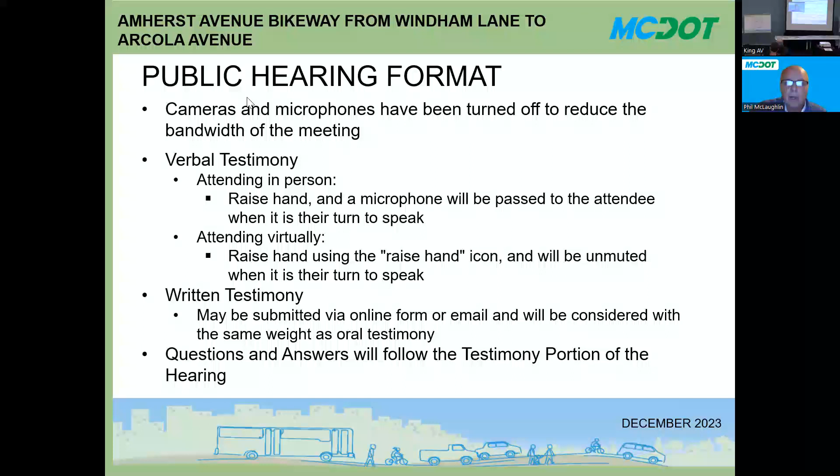Tonight's hearing is being held pursuant to Section 49-53 of the Montgomery County Code. The purpose of this public hearing is to obtain resident testimony and comments regarding the potential project, to assist in determining if the project is in the best interest of the public and whether or not it should be authorized for construction in its entirety or any portion thereof. This forum allows you to provide testimony about the project either in support or in opposition. Testimony and comments received may influence the final design.

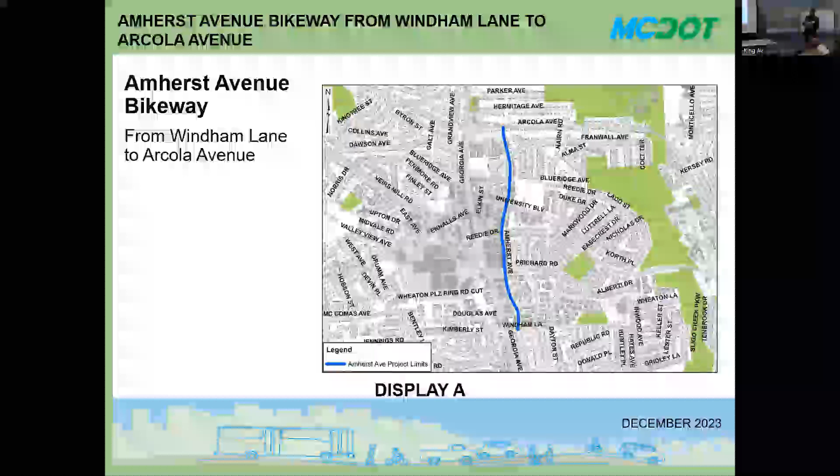The subject of this evening's public hearing is to consider a proposal to construct the Amherst Avenue Bikeway and other associated work at the approaches. For your convenience, we have posted a few downloadable displays that will aid in the visual description of this project on the project website. We will review them as I describe the project.

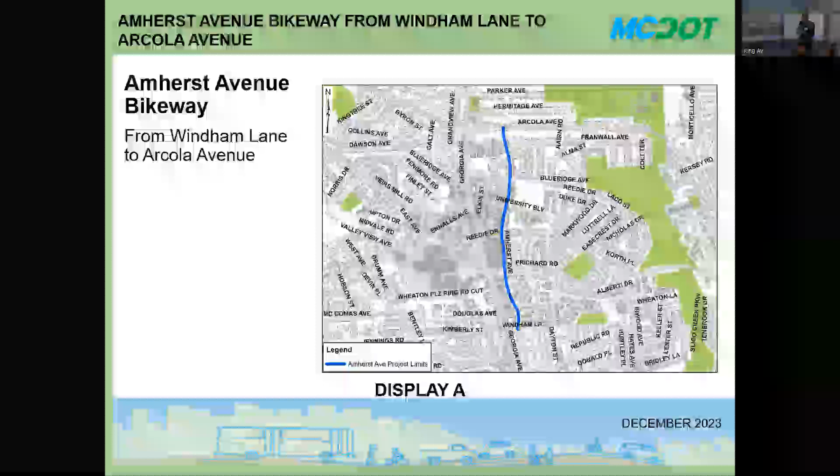Display A is a project vicinity map showing Amherst Avenue in Wheaton. The blue line represents the project limits of the Amherst Avenue Bikeway on Amherst Avenue from Windham Lane to Arcola Avenue. The total length of the proposed bicycle facilities will be approximately 1.1 miles long.

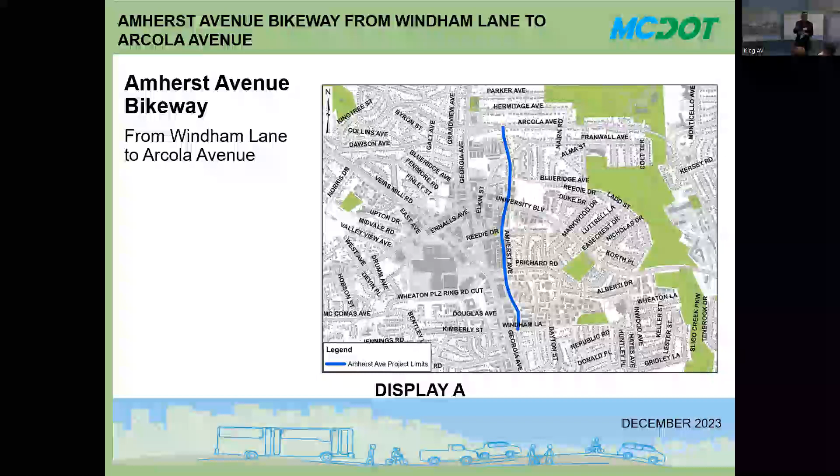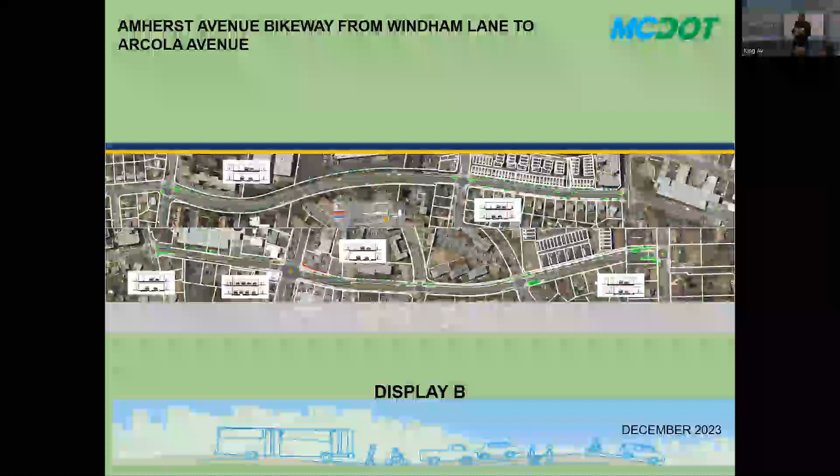Display B shows the improvements in more detail. The large plan shown on the screen can be downloaded for review. For tonight's presentation, we will use zoomed in images of the plan as I highlight several of the key features. The next several slides will show the Amherst Avenue Bikeway in more detail.

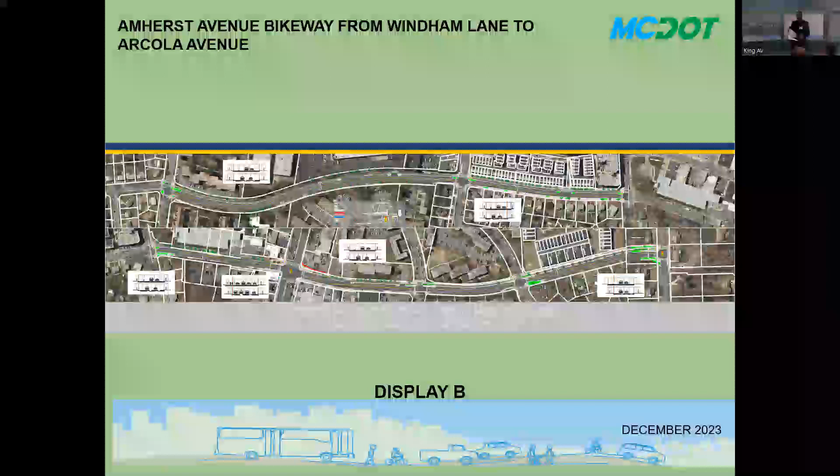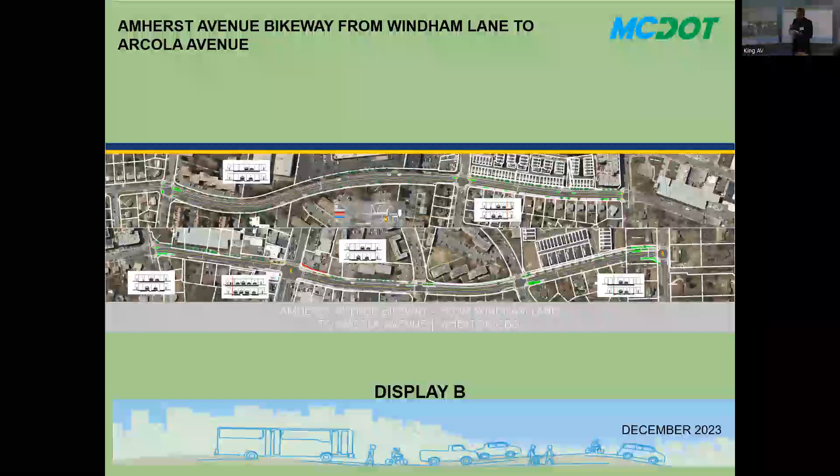Display B1. Beginning at the intersection with Windham Lane, an 8-foot wide two-way cycle track with a 3-foot wide buffer will be on the southbound side of Amherst Avenue. On-street parking areas will be 8 foot wide on both sides of the street, and existing parking restrictions will remain the same. In addition, the travel lanes will be narrowed down to 10.5 feet wide.

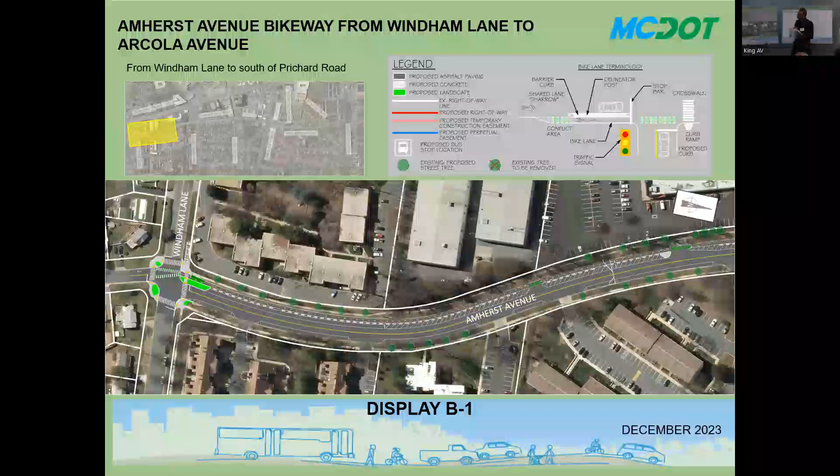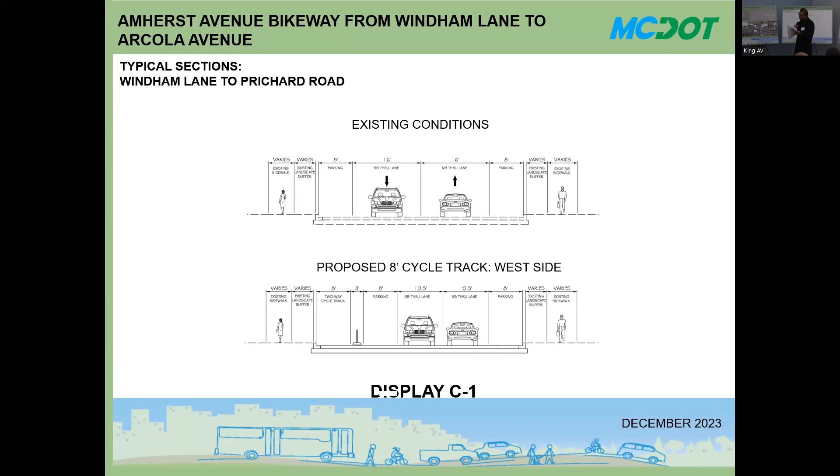Display B2. The 8-foot wide two-way cycle track with a 2-foot wide buffer continues on southbound Amherst Avenue through Prichard Road and Reedie Drive. On-street parking areas will be 8 foot wide on both sides of the street, where southbound parking will remain as long-term metered parking, and permeable pavement will be used to construct the parking bays for residential permit parking along northbound Amherst Avenue. Sidewalk along northbound Amherst Avenue will also be reconstructed to 4.5 foot wide to comply with ADA requirements and county standards.

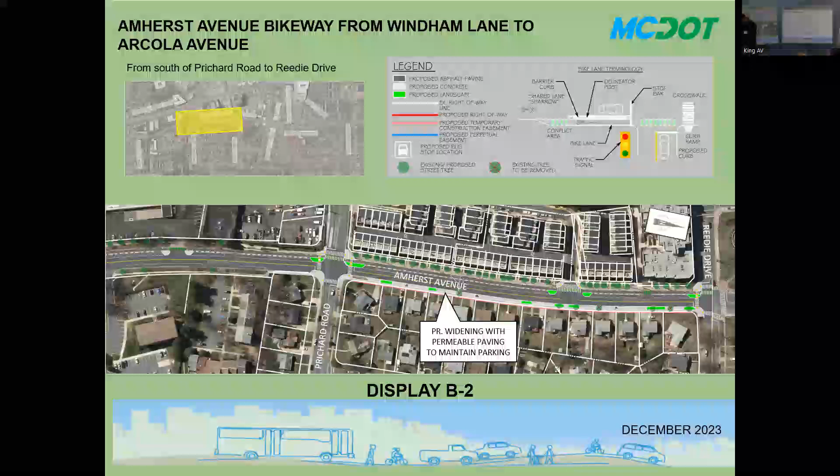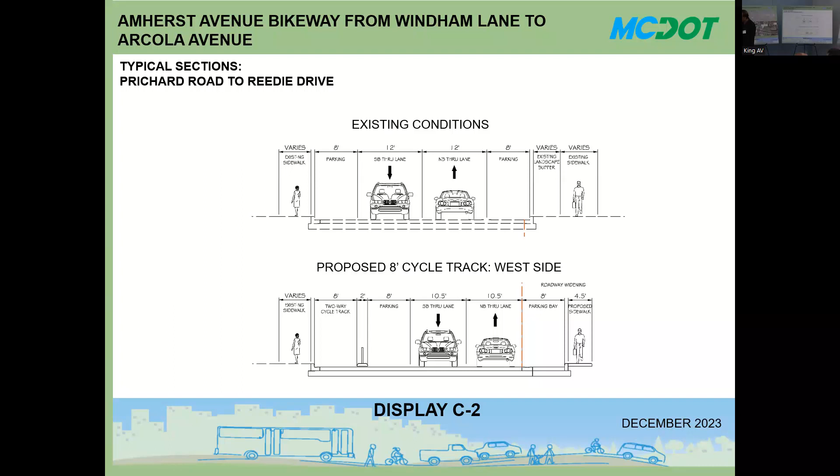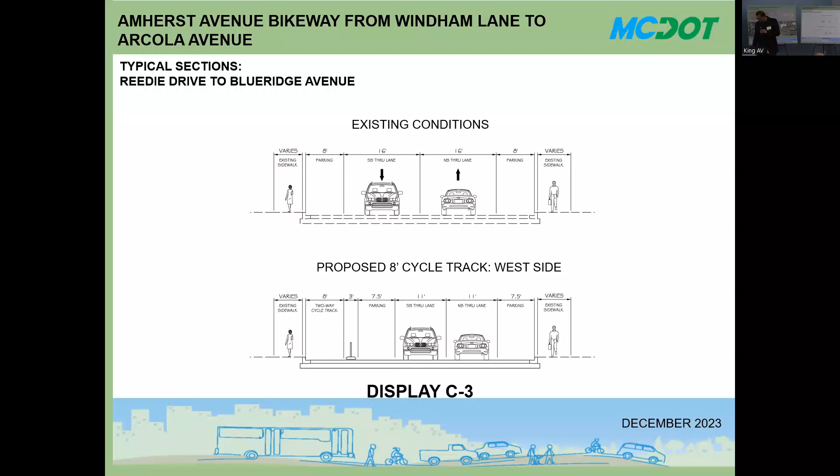Display C3 shows the typical sections corresponding to display B3 between Reedie Drive and Blueridge Avenue, beyond the intersection approach at University Boulevard. The top typical section is what exists today. The bottom typical section illustrates the 8 foot wide two-way cycle track with a 3 foot buffer on southbound Amherst Avenue, the 7.5 foot metered parking area on both sides of the street, as well as travel lanes to be narrowed down to 11 feet wide in both directions.

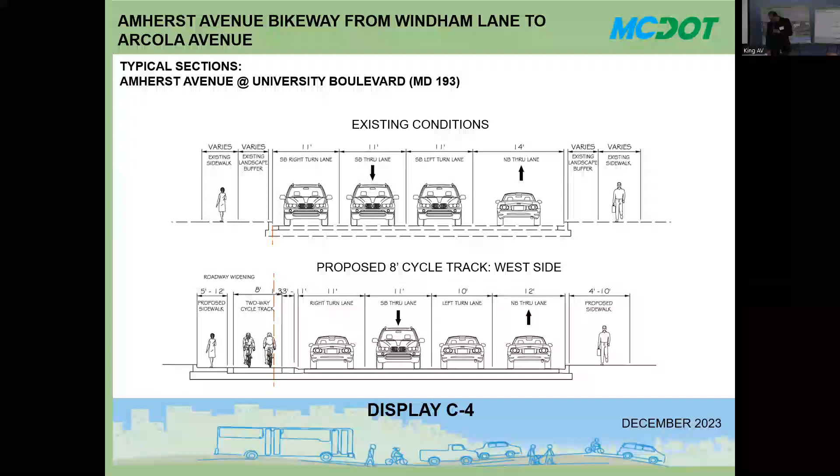Next slide. Display C4 also shows the typical section corresponding to display B3 at the north leg approach with the University Boulevard intersection. Again, the top typical section is what exists today. The bottom typical section illustrates the 8 foot wide two-way cycle track with a 3 foot buffer at the same elevation as the proposed sidewalk for southbound traffic, an 8 foot wide right turn lane, 11 foot wide through lane, and a 10 foot wide left turn lane, and for northbound traffic, a 12 foot wide through lane.

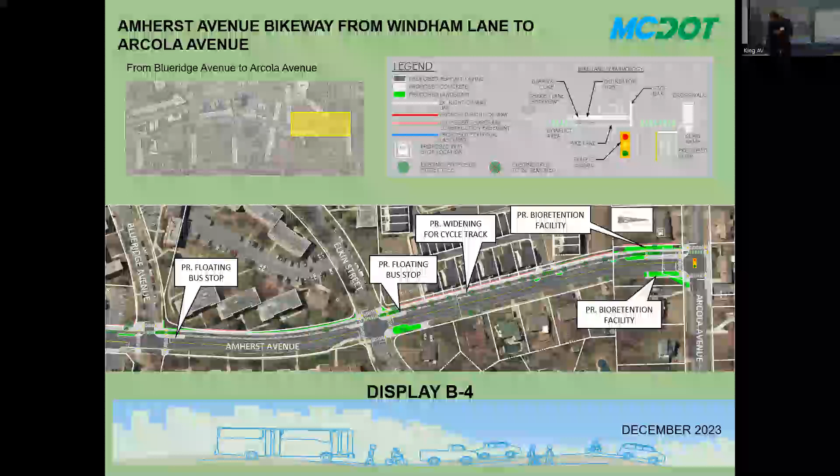Display B4: the 8 foot wide two-way cycle track with a 3 foot wide buffer continues on southbound Amherst Avenue through Blueridge Avenue and Elkin Street and ends at Arcola Avenue. On-street parking will be 7.5 foot wide on both sides of the street, and travel lanes will be 11 foot wide. Sidewalk along southbound Amherst Avenue will also be reconstructed to 5 feet wide to comply with ADA requirements and county standards. Floating bus stops are proposed near Blueridge Avenue and Elkin Street. Two proposed bioretention facilities near Arcola Avenue will treat stormwater runoff during rain events and provide better drainage. Finally, the Arcola Avenue intersection will be reconstructed to include bike crossing, traffic signals on mast arms with new signal timing and phasing, as well as curb ramps and pedestrian crossing.

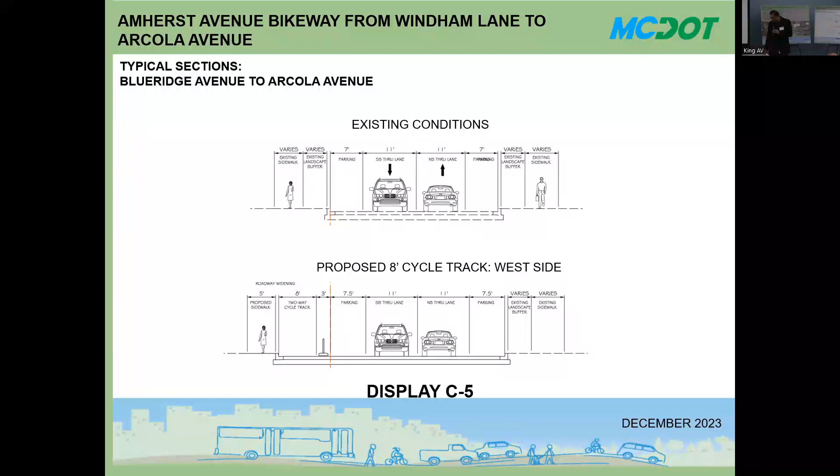Display C5 shows the typical section corresponding to display B4 between Blueridge Avenue and Arcola Avenue. Again, the top typical section is what exists today. The bottom typical section illustrates the 5-foot sidewalk, the 8-foot wide two-way cycle track with a 3-foot buffer on southbound Amherst Avenue, the 7.5-foot wide parking areas on both sides of the street, as well as travel lanes to be narrowed down to 11 feet wide in both directions.

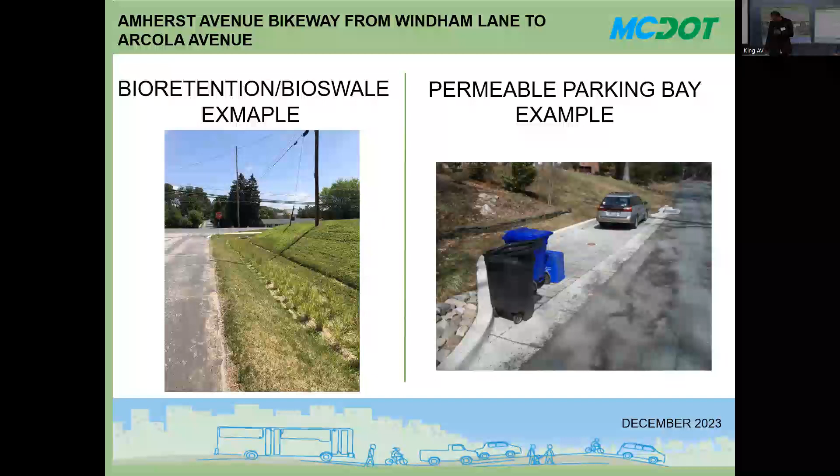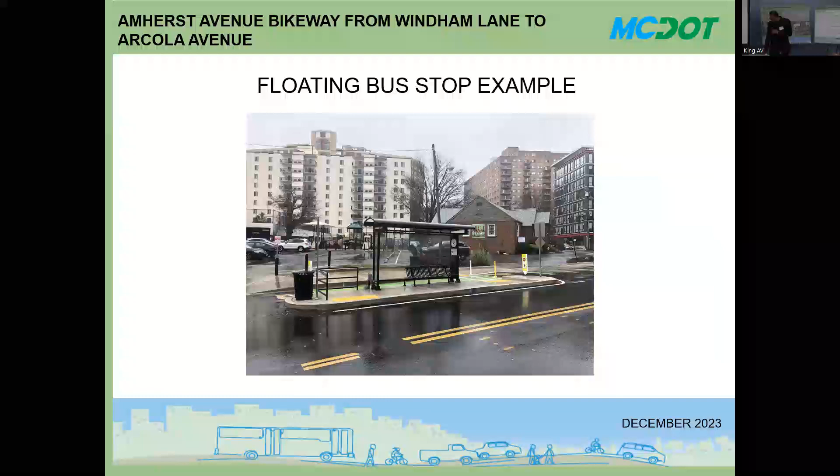This slide shows an example of a floating bus stop in downtown Silver Spring. The proposed floating bus stop will look similar.

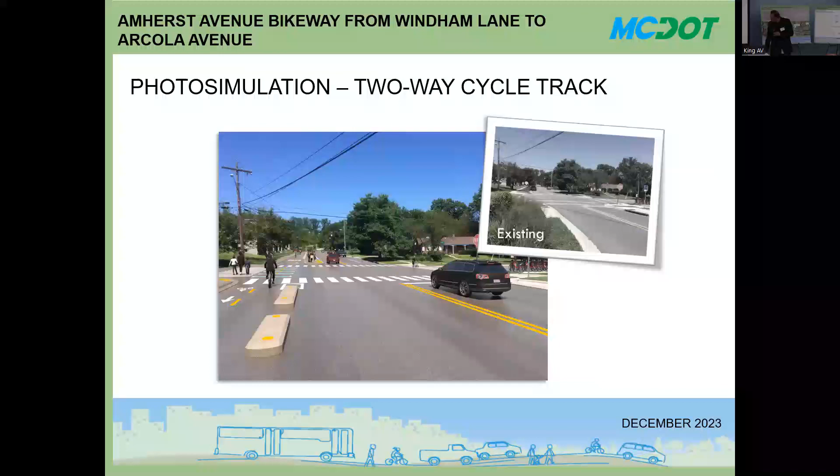The total project cost is currently estimated at $5,900,000, including engineering, land acquisition for fee simple, perpetual easement, and temporary construction easement, utility relocations, construction, and construction management costs. The design of the project began in spring of 2019 and is expected to be completed in summer of 2024. Construction is anticipated to begin in spring of 2025. The project cost, funding, and schedule are subject to change as the project progresses until it is complete.

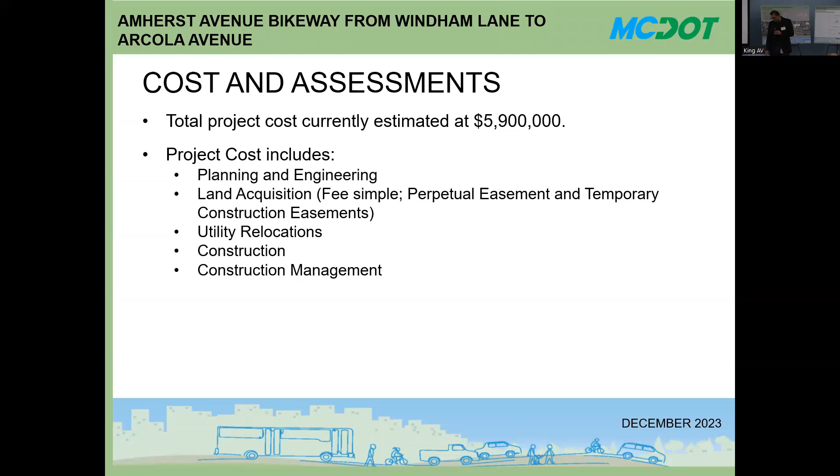Pursuant to Section 49-52 of the Montgomery County Code, there are no properties which are considered to be specially benefited by the proposed improvement. Therefore, no properties are expected to be assessed.

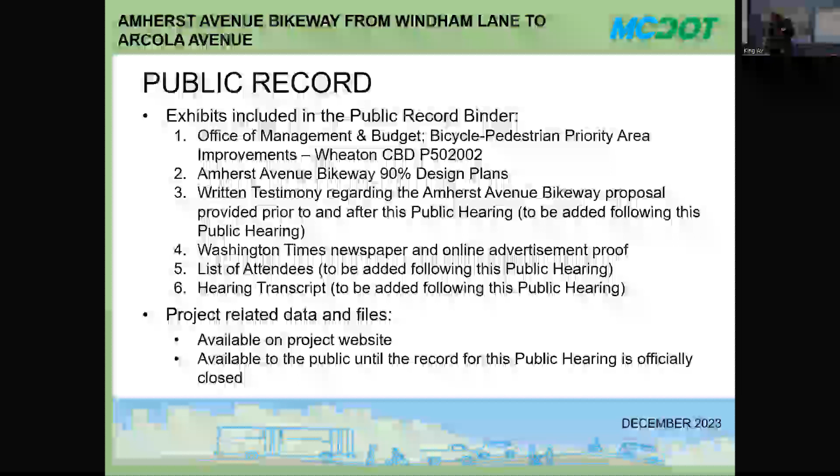Several exhibits are incorporated into the public record binder for your information and consideration. These exhibits are: 1. The approved fiscal year 2024 project description form for Capital Improvement Program CIP number 502002, Bicycle Pedestrian Priority Area Improvements, Wheaton CBD. 2. The design plans at the level of 90% completion with the latest revisions. 3. Written testimony provided prior to and after this public hearing, to be added following this hearing. 4. Washington Times newspaper online advertisement proof, and Montgomery County government press release. 5. List of attendees, to be added following this hearing. 6. Hearing transcript, also to be added following the hearing.

Project-related data and files can be downloaded from the project website at https://www.montgomerycounty.md.gov/dot/project/Amherst Avenue. The files will continue to be available to the public until the record for this public hearing is officially closed.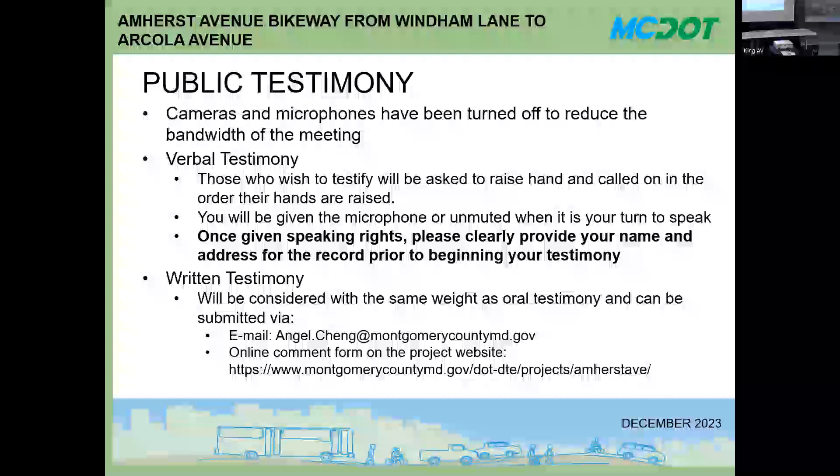As an automobile driver primarily, I am very concerned with the safety of bicyclists who are on roads, and now they will be much safer, so I am in favor of this project. We also have a current project of bus lanes on University Boulevard, which don't really connect to this, but we'll go through it. The issue I have is that we are just on the heels of a statewide $3 billion transportation shortfall over the next 6 years that looks like it will cut several projects statewide and will, of course, trickle down to the county. So I'm concerned that any money we spend may mean other projects will not be allowed to happen.

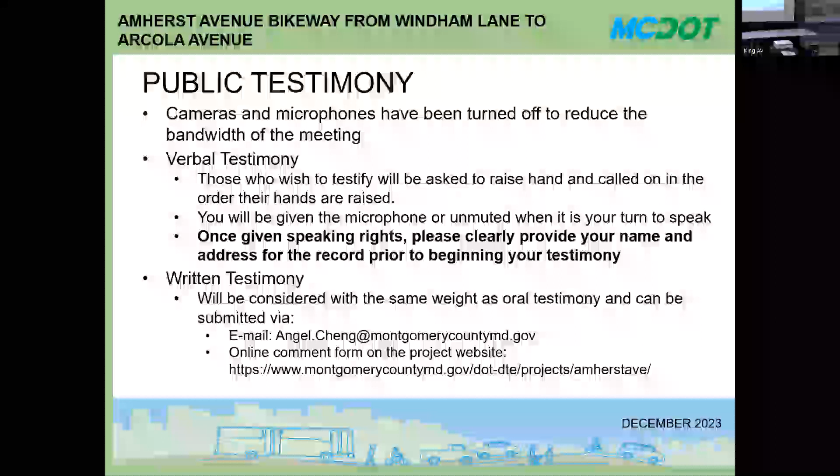And what this means for our county—of course it's the state budget, but we know that means a lot towards Montgomery County. $5.9 million is a lot of money to me and to a lot of people. I don't know how the county's plans over the next several years will be affected, as far as any and all projects, which all need to be reevaluated based on what money is coming in from the state. That's the main concern for me: that the money will not be coming in anymore, and what effects that will have on many county-wide projects. Thank you.

Hi, I'm Nina Coltnow, 2314 Parker Avenue. I live with my husband Louis, just north of the Wheaton Library.

To the point somebody was making a few speakers ago, it would be nice to get between the library and downtown Wheaton safely. It is treacherous, as everybody knows I think, to walk, bike, roll, or be a toddler on Georgia Avenue. It's really not supportable. So I'm completely in favor of this project.

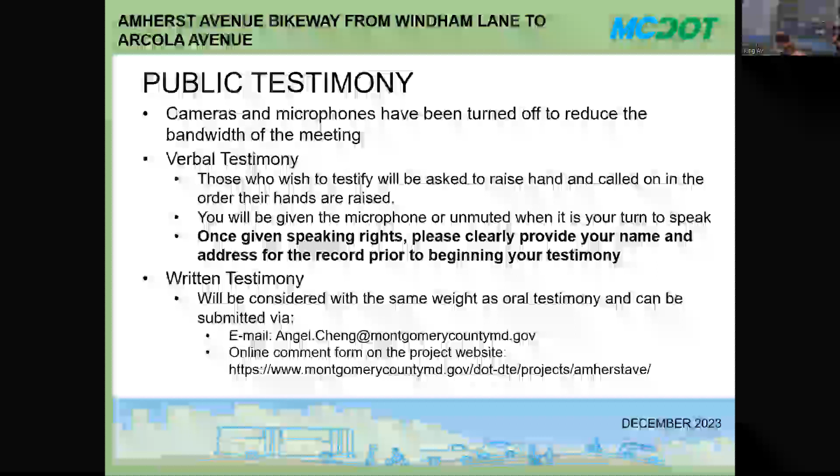But it goes north for 3 blocks to connect up with Shorefield. It doesn't end at Shorefield, it ends at Henderson, which connects to Shorefield. Getting that made into a bikeable and walkable right-of-way would go a long way toward connecting everybody, really, from Glenmont on down in a safe way. That's all I wanted to say.

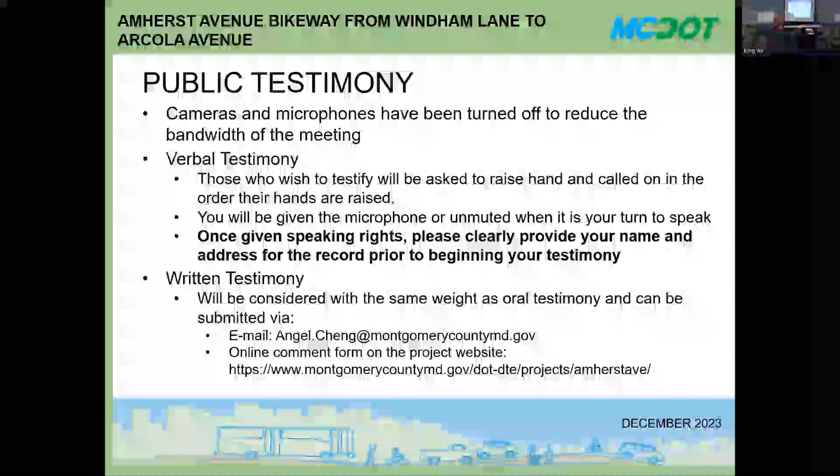Yes, my name is Mike Swinski. I live at 11366 King George Drive. I'm right off of University Boulevard, and I really appreciated that the effort was made when the bike lanes were put in.

When you had the sticks in the middle of the street, you could ride from over at Amherst all the way down to Sligo Creek, and you were pretty much separated from the rest of the traffic. I know this is a separate issue, but what I like about this is it's taken into consideration trying to slow down the traffic, create a separate dedicated lane where the bicyclists can be.

But my concern would be the trucks that are going to Safeway, that are on Amherst, and just the general flow of traffic over at Reedie. Because I walk from the metro and I see it in the morning, I see it in the evening, and I just see people going through the stop signs. What will be done with that would be a consideration of mine.

Overall with the project, to the previous gentleman's point about the transportation budget being cut, I'd be curious to know what kind of studies have been done on how many people are actually going to use this, and what is the cost-benefit. You're spending nearly $6 million on this project. You look at the Purple Line, you look at the transportation center in Silver Spring—$6 million now, when it's all done will be $9 million. It's an awful lot of money to spend for how many people are going to be benefiting from this.

Even though I'm a cyclist, I like the project, but I just wonder about the cost-benefit analysis for the whole thing. Thank you.

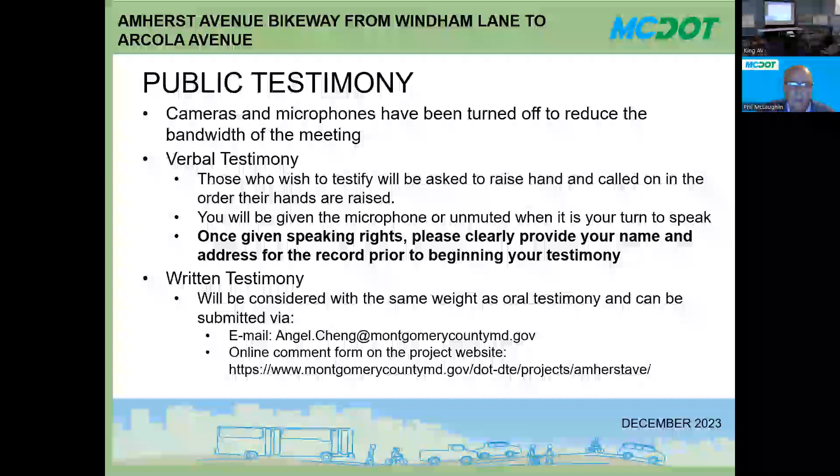So, echoing the comment made earlier, do we have any idea what the anticipated usage of the bikeway will be?

Can I use both mics? Okay. I mean, Jose, do you have any? Yeah, Matt, I'd like to introduce Matt Johnson. He's our bikeway coordinator from MCDOT. He has a lot of experience with this.

Thank you, Angel. Yeah, so the question is if we have any idea what the ridership, the use will be on this project. And we don't have great modeling for bikes really at this time because we don't have a network. So I want you to imagine the metro, right?

The metro, I took the metro here to this meeting this evening. I'm sure most of you in this room, probably everyone, but I don't want to hazard a guess, but probably everyone in this room and probably everyone on the Zoom has ridden the metro and has found it useful at least at some point. And we can imagine maybe the metro going farther out, being more useful to us, the purple line maybe being useful to us. We can imagine those, even though we don't necessarily know exactly how many people are, we can estimate that because we have this history, right?

But if we imagine back to 1976, when the metro only went from Rhode Island Avenue to Farragut North, out here in Montgomery County, there was no metro. People in Wheaton might have said, what is this useful to? I have to drive all the way downtown before I can even get on the metro, right? It doesn't go where I need it to go. By the time I get downtown, I'm already downtown. Why am I getting the subway, right? And it took a good 20 years for that metro line to get out to Wheaton, right?

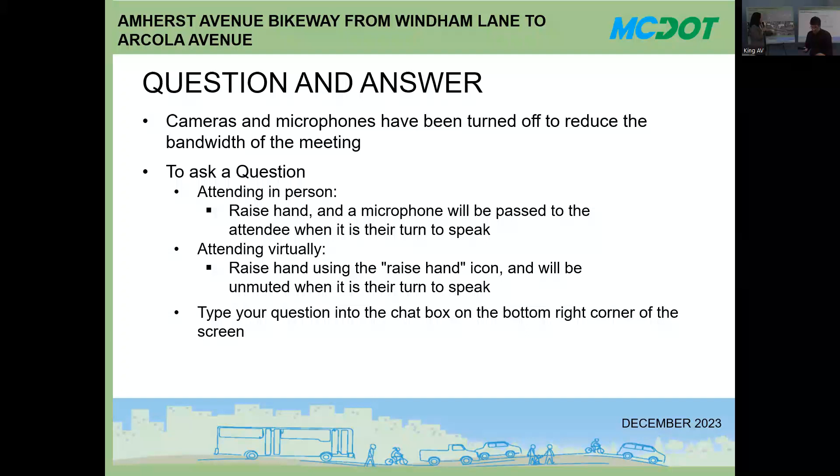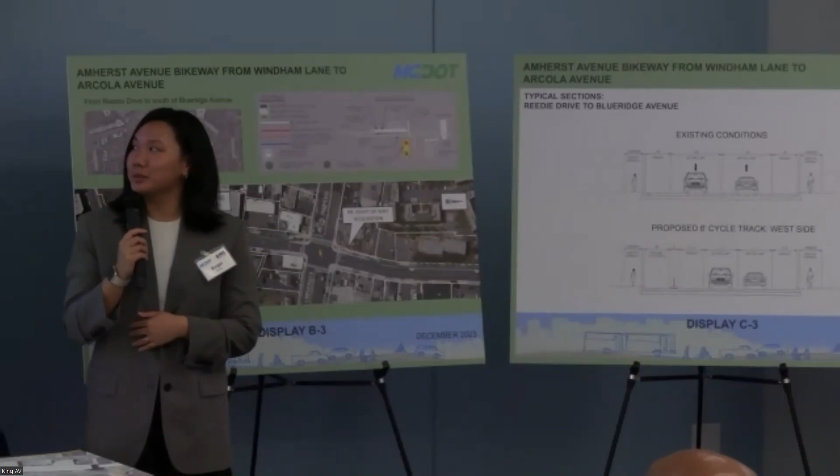Yeah, so it might be hard for everyone to see, so if you'd like to come closer, or you can look at it later. Oh, we can do the slide thing because we have technology. If it works. Except it doesn't work. Oh, we went to the wrong direction.

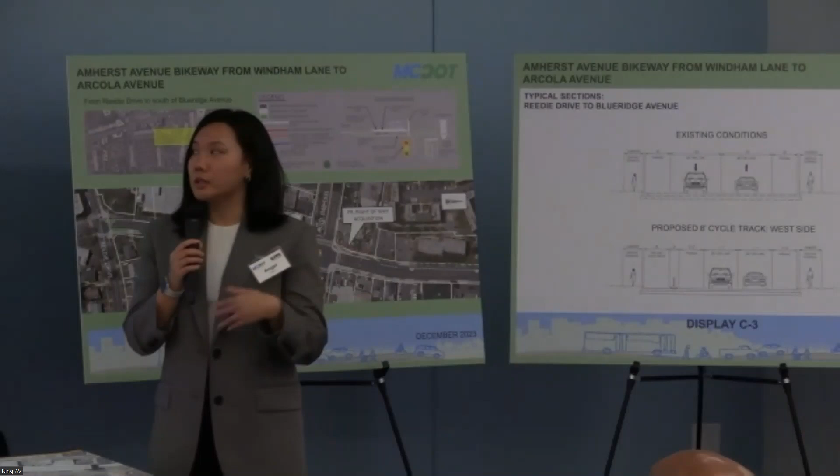Okay, right here. All right, so again, we're talking about the intersection at University Boulevard and Amherst Avenue. We're completely redesigning this intersection, including the traffic signal. Here you can see we have the proposed two-way cycle track on the top of the screen, which is the west side of Amherst Avenue. We're adding corner islands to tighten the curb radius for this whole intersection.

Now, how does that help in terms of safety? Well, with a tighter corner radius, it forces drivers to turn much slower. These corner islands also have a truck apron where it'll help larger vehicles make those turns. So it will make the intersection much safer when everyone is approaching it slowly and making the turn slowly, and it will increase the time for people to look for pedestrians also.

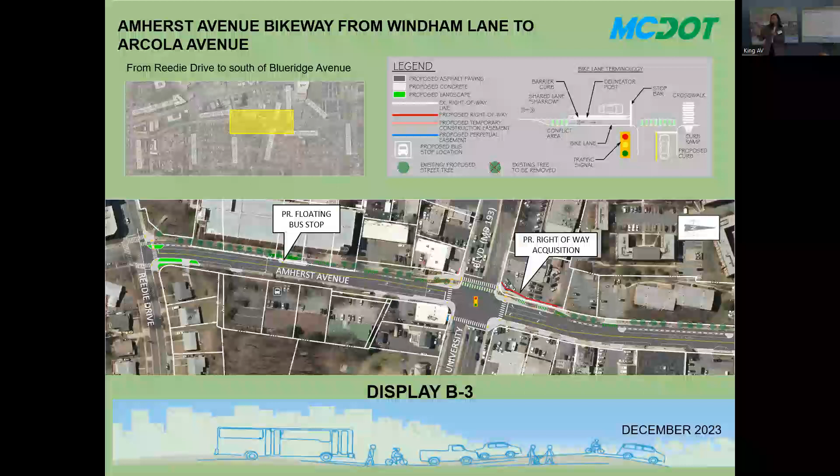We're restriping all four corners for the crosswalk, as well as adding the bike crossing here. We're also adding a bike signal for this intersection - a bike signal is the same as a traffic signal, but it's for bikes. So basically, it'll give a green bike light when it's safe for the bike to go. So the new signal phasing and timing will include a phase for cyclists to cross University Boulevard safely. We're also adding no turn on red for this intersection so that it'll be safe for both pedestrians and cyclists crossing University and Amherst.

And we're reconstructing the sidewalk approaches. The curb ramps will be reconstructed so that it will meet ADA compliance. APS signal push buttons will be included. And yeah, I think that's kind of a high level view of what this intersection will look like in the future. So, any follow-up questions?

Not on that specific intersection, but I am curious about the Pritchard and Amherst intersection. Are these curb bump outs to tighten the turn radius? Yes. Why has the county not considered, as other people have mentioned, speed tables? Because this is a downhill slope meeting a downhill slope, and I have to cross this every single day, and I swear I'm going to get hit one day unless something is done to physically curtail that. I understand it's like a narrower lane, but I went to the Netherlands - speed tables do this, you don't even need a stop sign to do it. So there, and at the Reedie intersection, it's the same story on both of those.

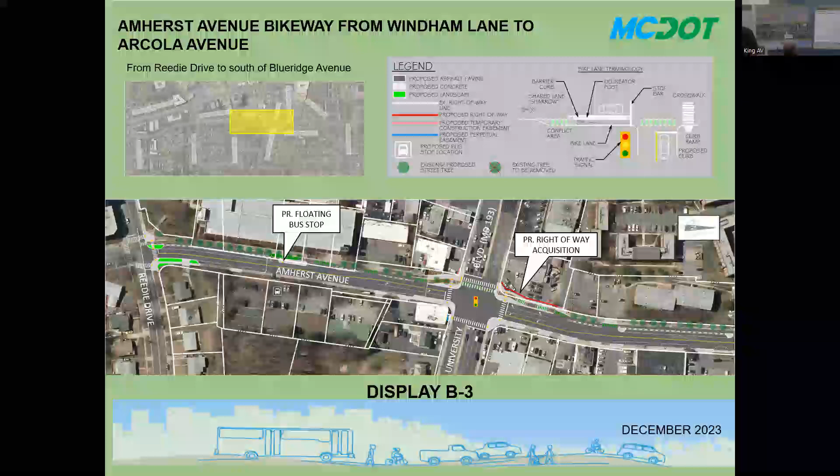Yeah, and we can take a look at it and see if it is feasible. But one of the things we have to consider when adding a speed table or speed bump in general is whether the drainage will work. Because a lot of times when we raise a certain area, we have to consider how the water flows when it rains - we don't want to make the road flood because of that. But we can take a look at it again and see if it's possible. We can potentially consider a raised crosswalk if that could help. But again, we will have to look at the drainage area to make sure the water will flow when it rains.

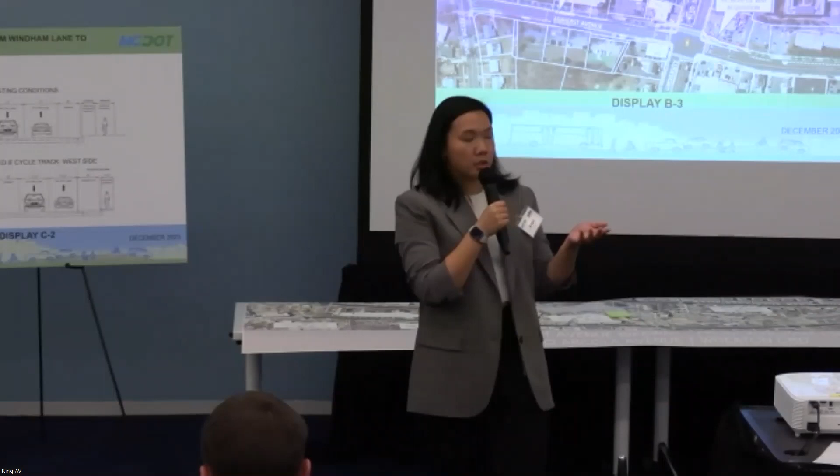Yeah, so we've been coordinating with them for this particular intersection. We have submitted our traffic impact statement to them. They have looked into our preliminary design and approved of it. So moving forward, we just have to get their blessing on the final design. And then throughout construction, we have to coordinate with working in their right of way. But they are aware of this project, and they pretty much gave us approval after making sure that we meet their standards and criteria in terms of the bike signal and reconfiguring the intersection.

So assuming that you go first and make your changes, whatever their requirements are won't undo what you guys have already done? You know where I'm coming from. It happens, it happens all the time. So at this point, no. But the left hand does not always talk to the right hand, which brings us to Blue Ridge, which we'll talk about separately.

But that whole Blue Ridge Georgia issue really gets more complicated because you want to have that west bike lane. Yes. But that also prevents cars that are trying to go north on Georgia from University, so we lose the turn lane there. So there really needs to be some community input into that.

Yes, absolutely, particularly that intersection, because nothing's happened there. It's horrendous. We've been fighting with DOT forever and a day to do something, and then it gets caught, and then you talk to SHA, and they're like, 'Well, we don't know anything about that.' So yes, that needs to be high up on the priority list. We understand, and we take note of that. Thank you.

Anyone online, Lori? No, I think not.

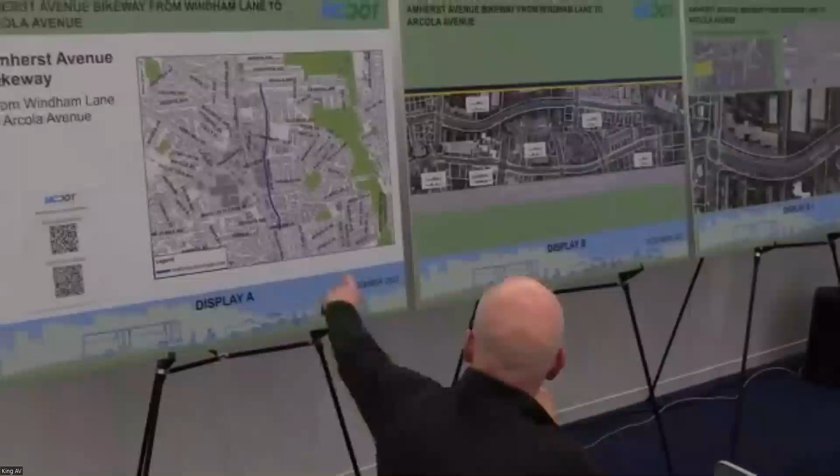So people have mentioned linkages of other bike paths in the future. And it would seem to make a lot of sense if you're going south from Windham Lane, roughly parallel with Georgia Avenue towards Silver Spring. Are there plans in the works for that? And yes, there is. How does the timing work with this?

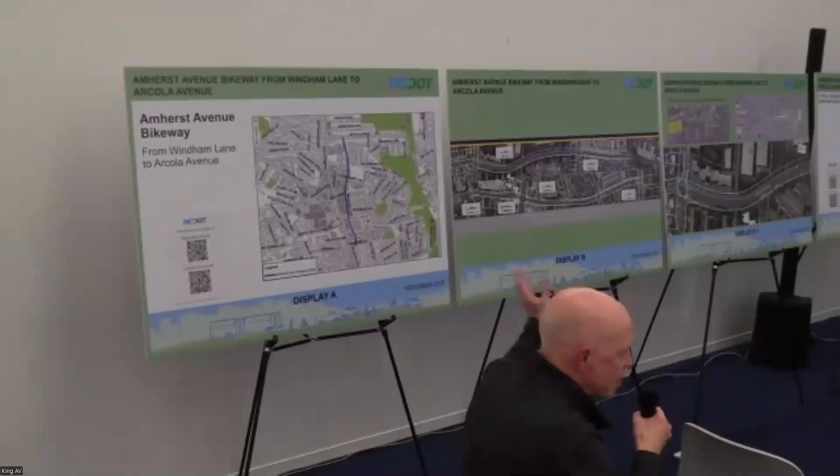Yeah, so there is a planned bike facility on, I believe it's Woodland Drive, beyond Windham, I think. So there is a neighborhood greenway that is planned for that section. Now, Amherst is funded by the Wheaton BiPPA program, and it's limited to the Wheaton CBD area. Anything beyond Windham is unfortunately not part of the Wheaton CBD anymore. I don't believe we have a plan anytime soon for Woodland Drive yet.

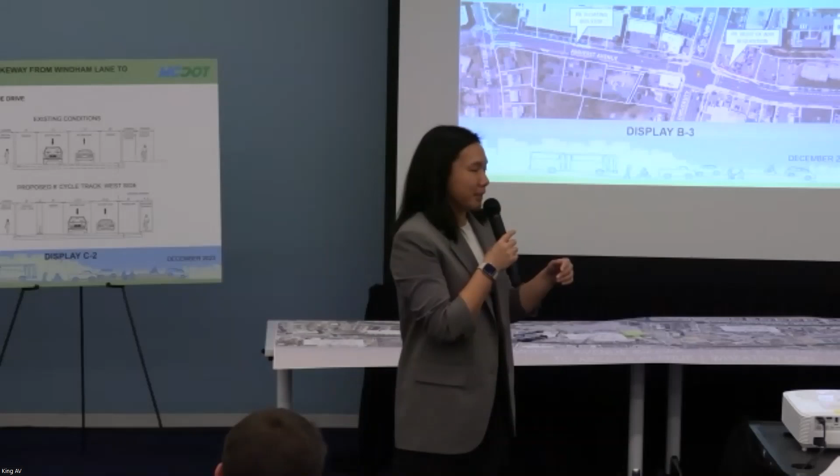But Matt knows everything. Not everything, just everything bike related. So yeah, Angel's correct. I just wanted to add a little bit.

This corridor from Arcola all the way down to Montgomery College, the Fenton Street, Woodland Drive, Amherst Avenue, is one continuous corridor with a few interruptions. The Fenton Street project is basically at 100% design.

We're hoping to go to construction next summer, and that will get the bikeway through downtown Silver Spring. It connects to the Metropolitan Branch Trail just south of Burlington Avenue, Maryland 410. The Metropolitan Branch Trail is a regional trail in Montgomery County that runs basically right next to Fenton Street down past Montgomery College. There's a gap at the DC border, but DC is actively working to connect their piece.

Once you get into Fort Totten Metro, it starts up again and goes all the way to Union Station. So this is a continuous corridor that within the next few years will go all the way from Union Station in downtown Washington up to the north end of Silver Spring CBD.

This Amherst project will also get built. There'll be a little bit of a gap though between Fenton Street and Amherst in Wheaton, but Woodland Drive and Amherst Avenue, it's still Amherst just south of Windham. It doesn't change to Woodland until a little bit further south.

Those two projects, at some point we will do a neighborhood greenway. It may be phased. There's that medical campus that was mentioned earlier that's kind of a gap, and then there's the Beltway, which is also a gap.

Now, the master plan does call for some kind of better connection across the Beltway, whether that's a wider sidewalk on Georgia Avenue underneath the bridge, or a new bridge across the Beltway, maybe even with Woodland Drive. We don't know - it's way too early, and that would be a very expensive project.